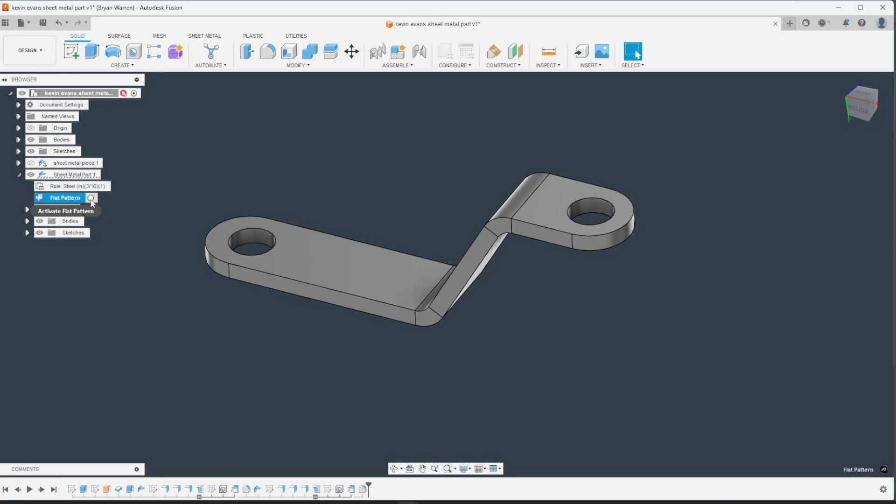Here's a sheet metal tutorial. I don't really do sheet metal too often, and there's a process that you have to go through to do your edits properly and everything. And I always forget because I don't do it a lot. So here's just a quick little tutorial on what to do.

So first you have to start by making a new component, and then when you make that new component, you need to set your sheet metal rule. Your sheet metal rule is basically the thickness of your sheet metal. So set that, and you're going to need that when you start making flanges and stuff. So after that's done, create a sketch.

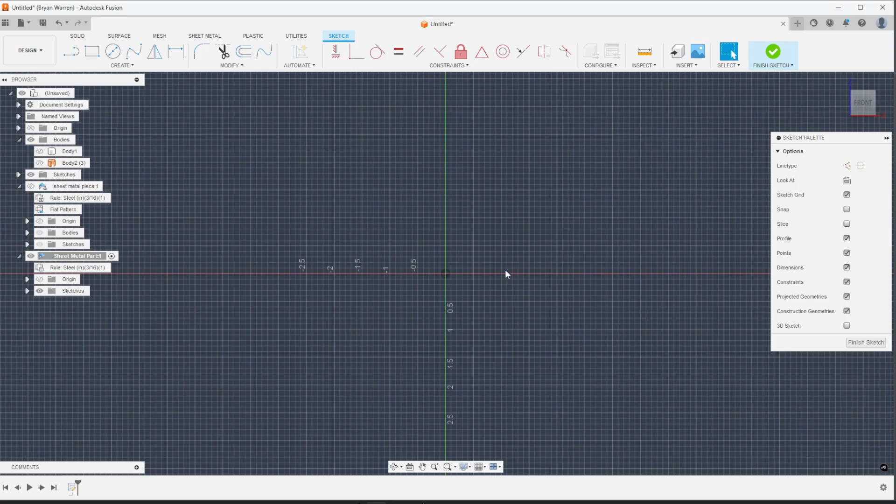I like to just make the part initially, not using the sheet metal tool, because then I have my dimensions laid out and I have something to go off of when I'm actually using the sheet metal tools. And so when you go to start making your first sketch, turn on that model that you've made and use that to project the bodies you need to at least start your first flange.

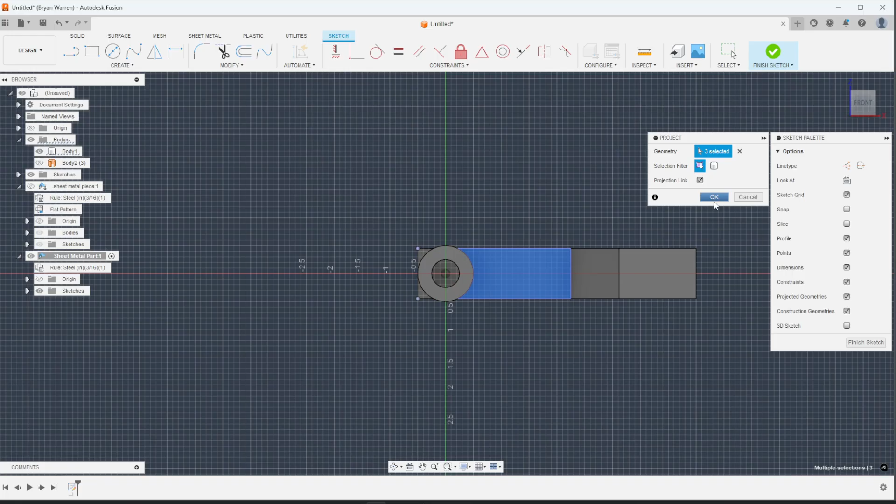Just sketch it out like you normally would. Delete that projected line you don't need. Finish your sketch. So go to your flange tool, select the surface area, kind of like you're extruding, and then hit OK.

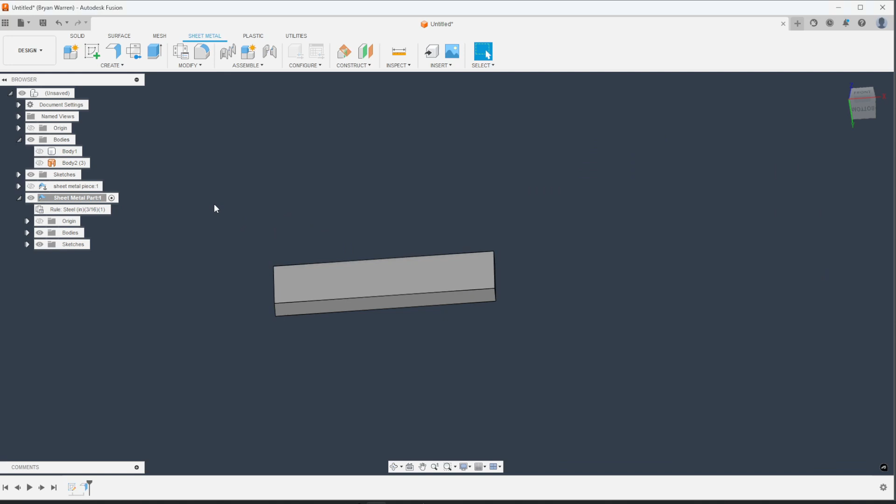Next, we're going to add another flange to it. Just start pulling it up. Don't worry about it too much, just pull it up. You have two options to change the way that your bend is bending: your height datum and your bend position. I usually only mess with the bend position. That seems to work for me every time, and I'm no expert in sheet metaling.

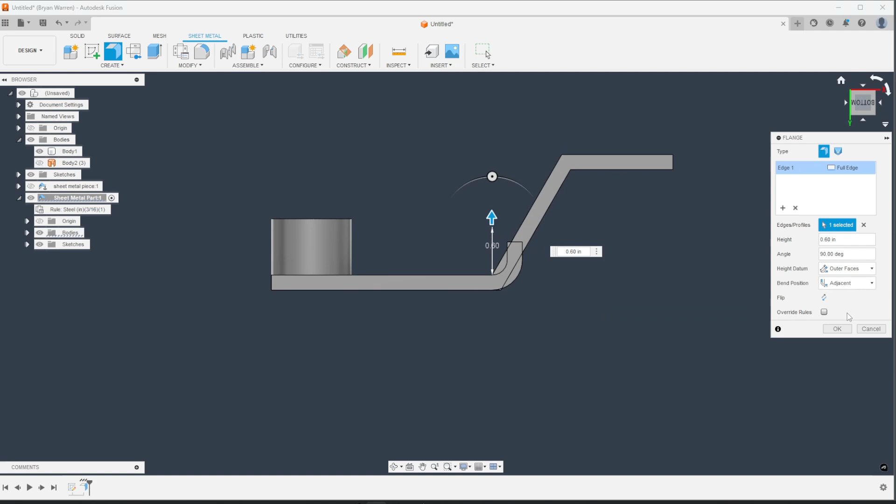And you just basically change where the bend position is at. You either have to go outside, inside, adjacent. Just play with one of them. That's the beauty of modeling the part ahead of time, because then you know exactly where you need the bend to be. Just move it around where you need it to be. And hit OK when you're done with that.

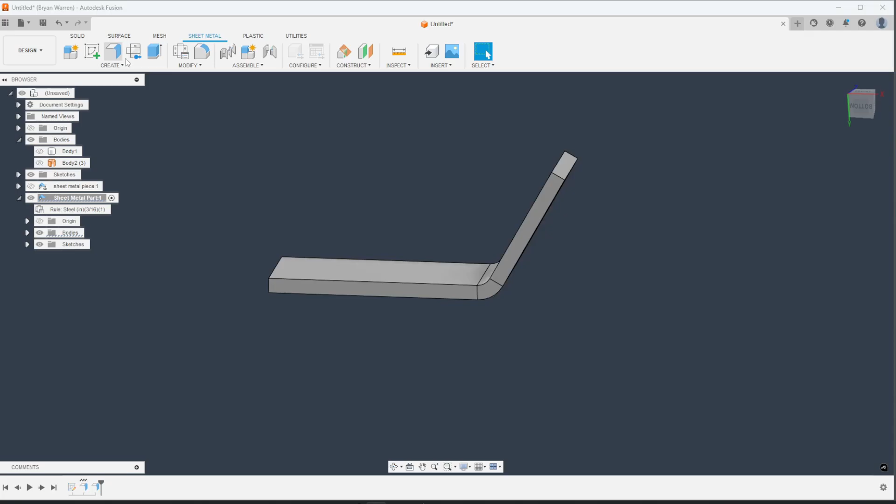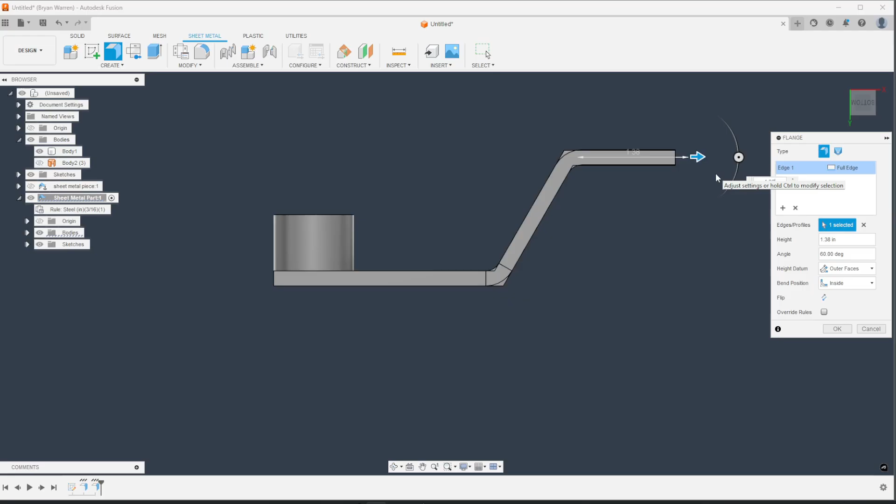And then we got to do one more flange. Pick the edge you want, pull it out, turn your model back on, make a change to your bend position, set the length, and then once you're done with that, just hit OK. And now you've got your basic shape.

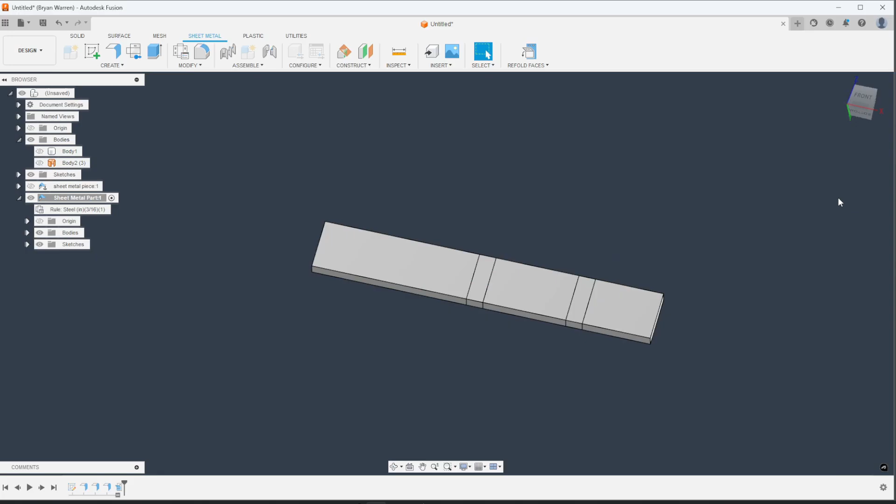So what we got to do now is we have to add some holes to it. And this is where I always get confused. You need to go to modify and unfold. And then unfold it here, and this is where you want to add your holes or any cuts or any modifications to the overall piece. You want to do it in the modify unfold. If you use a flat pattern instead, any changes you make won't copy over to the bent part.

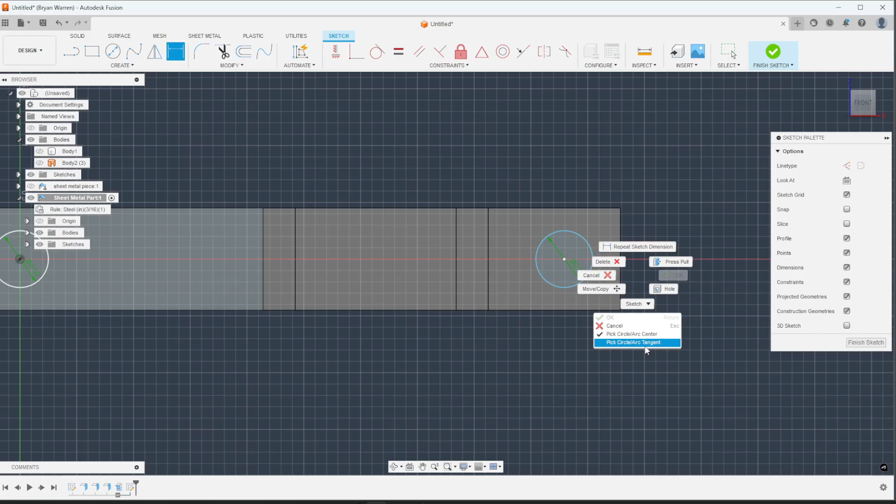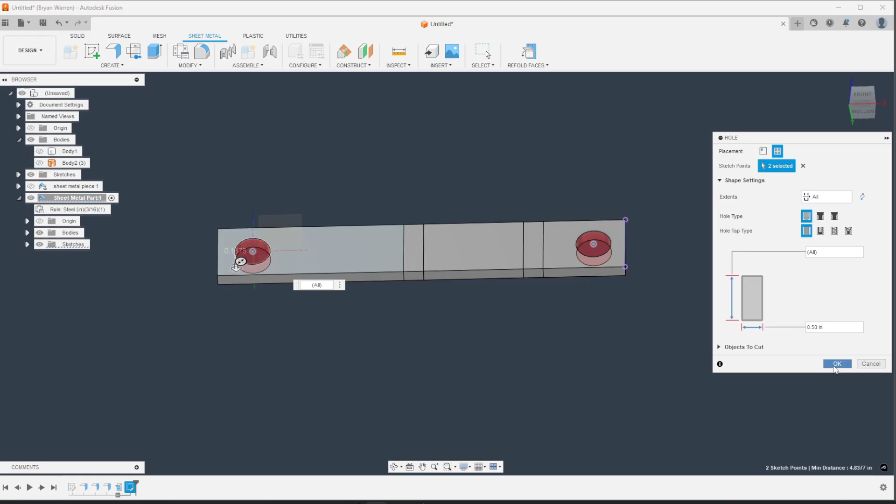On this piece, I just need to add a couple of holes. Dimension them out. Oh, and I almost made a mistake. I don't like to do holes by extruding. I like to use the hole tool because it's a lot faster when you need to make a change to the hole size. Make sure you set it to all just in case you change the thickness on the material. And then you want to refold the faces at this point.

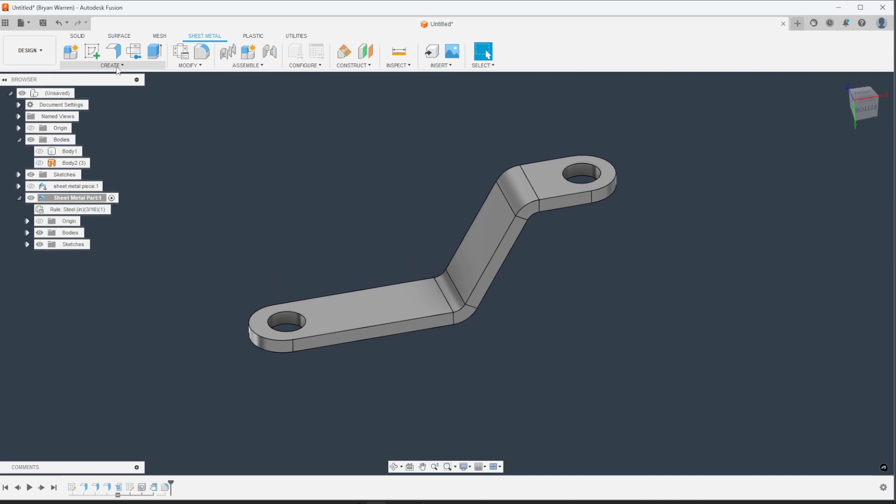So now that we have this done, now we need to add our fillets to the part just to give us some nice rounded corners. And here's where we're going to make our flat pattern for like a DXF file or drawing, so we can actually dimension out the bend position so you know where to make your bends. That's all you have to do. Now you've got your flat pattern set. Save the file. As you can see, you can fold and unfold at any point.

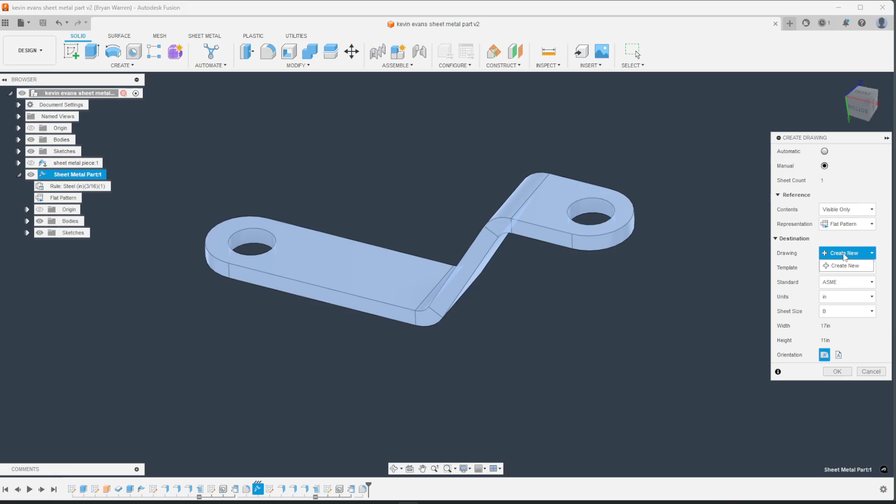When you're going to make a drawing, set the model to the flat pattern, because you can't actually import the flat pattern after you've already created a new drawing. So you want to do the flat pattern now, and then when you go to add more views of the part, it'll come in as the bent position instead. And you'll see in just a second here. Make sure the size is right. Just drop it where you want it.

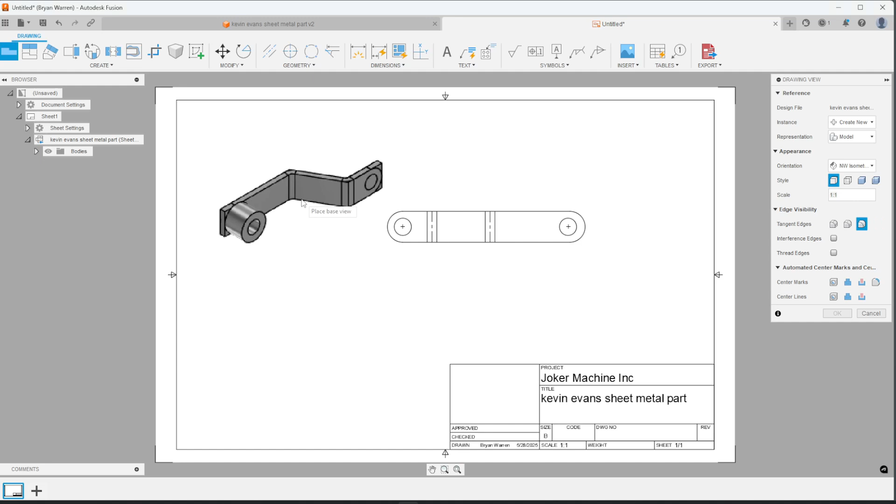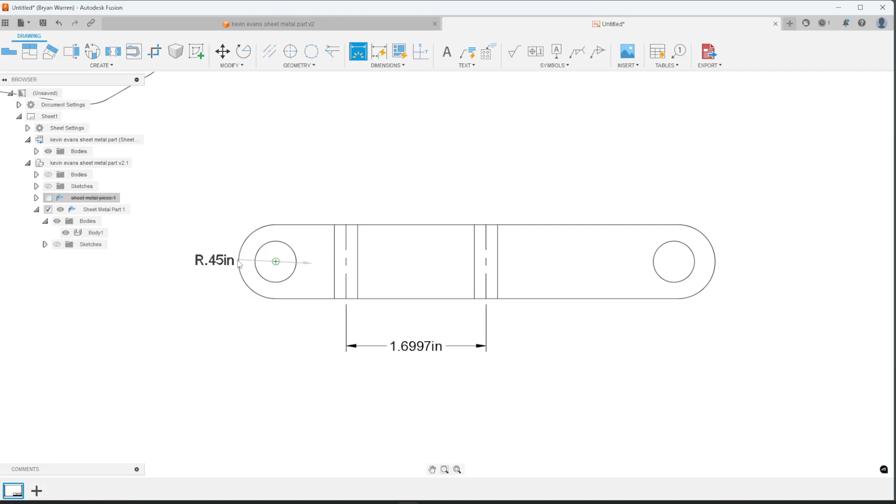And then just turn off any bodies that you don't want to be seen in here. I just wanted to show just the actual flat pattern I just made. So I got to turn off that model that I made and some other part I was messing around with earlier. Now you can add your dimensions so you can send it off to get bent. Because I don't know about you, but I don't have my own brake. I got to have somebody do it for me. And you're basically finished at this point.